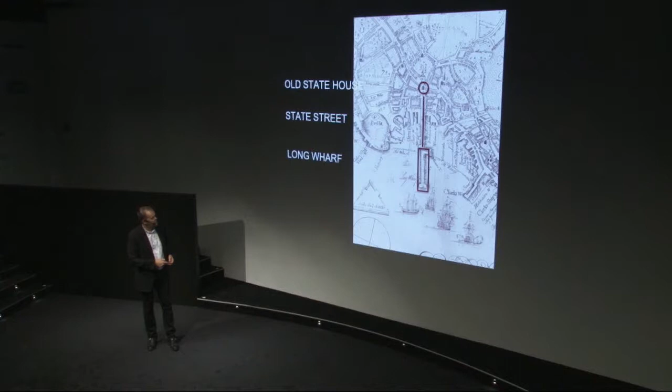This is Long Wharf. Here's the State House. And this route between the center of merchants at the wharf and the center of power at the State House becomes the origin of the financial district. So the financial district emerges between these two things because there's water and a hill.

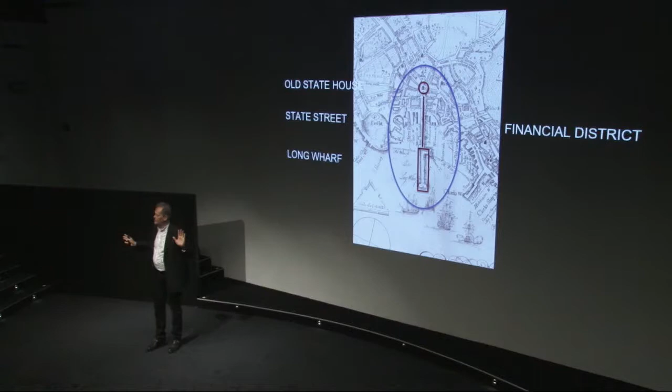It's not just that simple, there's an ecological structure to this place which leads to how settlement occurs. So there's the State House, and Long Wharf is here. This is the Boston Common, and as I always say, it's on the sunny side of the hill because pilgrims aren't stupid, they put the cows in the sun, not on the snowy side. It's all defined by the ecological structure of that place.

In fact, cities are really just about transactions. We come to a city because we want a transaction. You and I are having a transaction right now. If you bought something at lunch, that's a transaction. If you go to see your friends, that's a transaction. This crossing, this social intersection, is the reason that cities exist.

So we have to understand where they come from and how they're projected into the future. Just to finish on this idea, here's the Boston Common, Commonwealth Avenue. I used to live right here. And this pattern does not change in 400 years. So you will never see this building built over here, and you will never see this little house built in there, because the distribution of the uses in this connected infrastructure is entirely based on the ecology of place. So when you look at every city, you must think about that ecology.

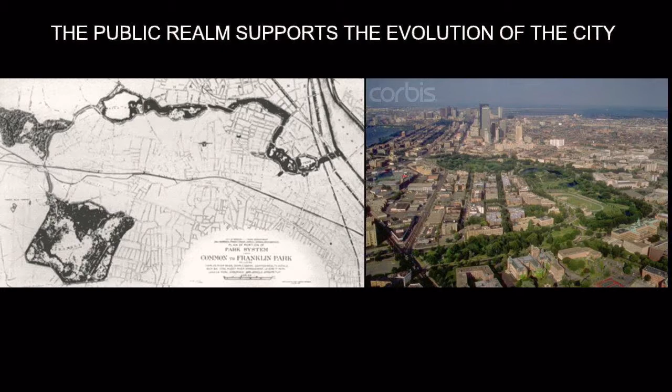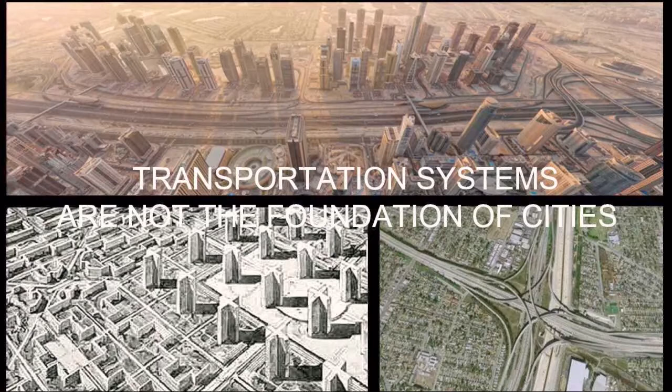That was then expanded by Olmsted into this beautiful system called the Fenway, and over time the city grows around that framework. My point is that transportation systems are what most people think are the basis of the city, and that is not true. Transportation is a consequence of the ecology and commerce of the city, it is not the driver. Most people working in cities think that transportation is number one. No, it's number 3 or number 4 or number 5.

Human systems and nature are the foundation of cities, especially if we want them to be sustainable. We at Civitas, which is the Latin word for city, like to say we're not suburbitas. We're about the real city. We build cities from nature up and culture down.

So which kind of city should we build? This is a very complicated system, and this is another very complicated system. But this is not the answer, to have one next to the other. Somehow we have to find a way of integrating these two things together.

Now I'll start to show you projects where in every project we are trying to integrate culture and nature together to make a healthier, more sustainable city. There are probably 3 or 4 projects here that you will recognize, but there are several that you will not recognize.

Am I talking too fast? Is it okay?

In America there's been a long progression of city building, but by the 80s the downtowns of most cities were failing because the suburbs had taken the economic energy away. We were looking for new ways to bring people into the downtown of every American city, hoping that new residents would bring new money, new life, new culture, and a much healthier social system.

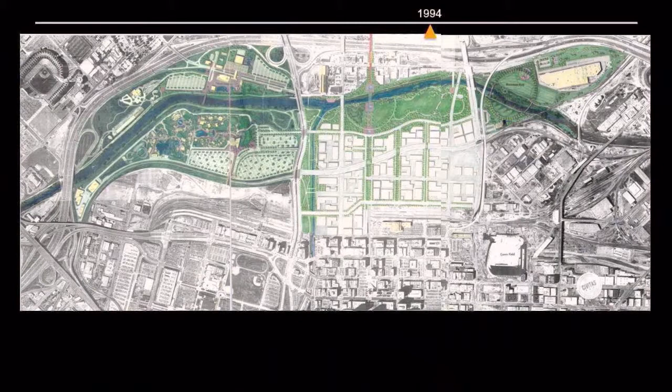We also reminded people that the city began here and the center of politics was here, and that this line was an important connection. We took the river itself and we actually rebuilt the river, about 3 kilometers of the river, rebuilt the entire bottom of the river to protect it because it was failing.

We moved the trains, just 2 tracks down the middle of the valley. All the other trains left. Again, the station, there's the train station right there. It's almost the same picture you saw before. It was empty.

Then we started building connections. We designed 3 bridges for pedestrians and bikes that connect the city together. And here it is from last year. So here's the river, this is the other river. Here's the park that we made. And this is all the new development that's taken place since 1988 when we began. Here's one of our bridges.

And these sites now are complete. This entire neighborhood is now done. About 6,000 residents live here today. And I would say it's about 5 million square feet. I can't immediately convert that into square meters, but it's a lot of growth.

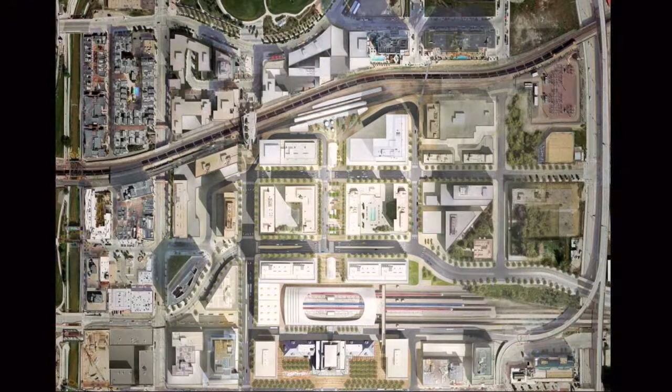So one of the things we did is we did a master plan for the train station. And something that's probably coming to the Czech Republic, it's not here yet, is that we cannot do anything in the United States without engaging many stakeholders, many groups from the public, and anybody that wants to come. So when we were given the assignment of doing the new master plan just for the station, which included the tracks, how do we bring trains, trams, buses, taxis, cars, bikes, and pedestrians all together in this station? That was the question. We were given a task force, a committee to work with. It was 91 people. So we met once a month for 3 years with 91 people every month.

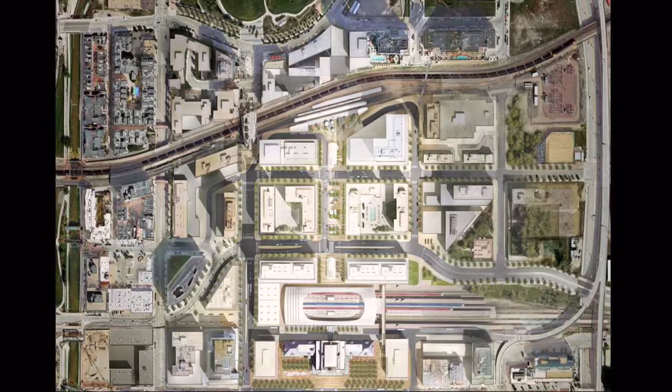So these are very complicated projects from a political point of view. But what you see here is a limited number of trains here. These are the trains that go across the country, passenger trains. We moved the freight trains. The freight trains were here, they moved sort of over here. This is our tram system and a bus tunnel. There's buses underneath that connect these two together.

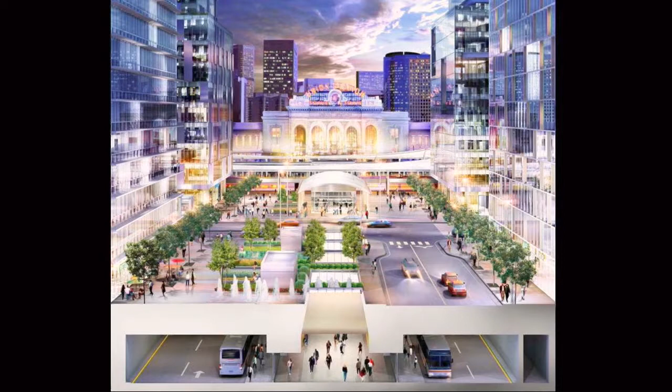And so here you can see, this is a drawing, but it's now all built. The train station, so the buses were underground because we were having too much trouble with too many things on the surface creating a problem. So we finally decided to put the buses below. And the station has become the new center of our city. It's really interesting because it doesn't have very many trains today, maybe only 5 or 6 trains every day, but it is the center of the city, and you can see the new development happening behind.

With that project, I learned how to deal with these very complicated things. Remember, there's law, there's politics, there's economics that all have to be solved. All those things have to somehow come together to make these things happen.

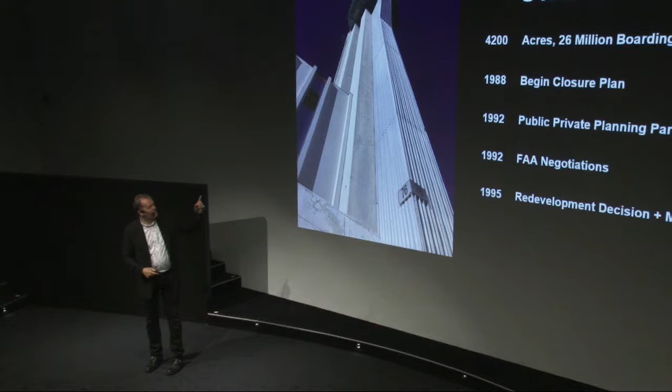So I have been working on this one project for 30 years, and I'm on my 4th mayor, still working on the same project. And so every new mayor, I have to tell them the history because they don't know it.

But we began a public-private planning partnership in 1992. A wealthy man came forward, he believed that if the city did the planning for the closed airport, they would make a mess of it. And so he stepped up, he created a foundation, he gave the foundation money that hired us to start working on a plan to find the best use of the property.

I began negotiating with the Federal Aviation Administration, so with the airline people in 1992, and we got a decision by 1995 that we would redevelop. I could speak for the next 10 hours just on this one project, so I now speed up. You can see it's only 5 miles from downtown.

I'm not going to read all this, but this is what I have done. I was a participant in a citizens task force, the author of the first plan, advisor on the Stapleton redevelopment plan, co-author of the development plan. I led all the rezoning. I formed a new governance organization, a new public not-for-profit corporation whose members are appointed by the mayor, and I was appointed by the mayor to lead this organization.

Then the organization started to have trouble, so then I was taken off of the organization by the mayor to do an audit, and we found many problems inside the organization. So we took the organization apart, and then I was asked to lead the selection of a developer. I also led the negotiating team. Then we wrote design review, structure, and guidelines. Since 1988, I chaired design review, and since 2002, we are also designing all the parks, which is actually 500 hectares of new parks. So imagine 30 years on one project.

But the reason that we have become global in our reach is this one project taught us everything about real estate negotiations, about real estate finance, about all the different issues with taxes, all the issues with the law and the politics and the infrastructure, and so on and so forth.

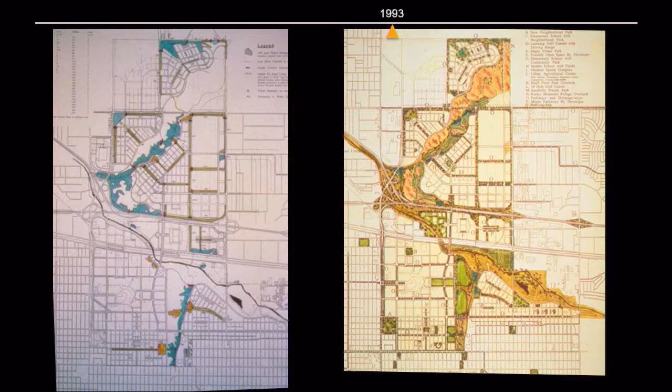But we began with nature. And what we found is that here's the airport, we had a problem with the stormwater. So we created a plan that would hold the stormwater on the site. So when the rain comes, it fills with water. And we use that as the backbone of a new system of open space. So we used the ecology. We created a new ecology as the basis of city building.

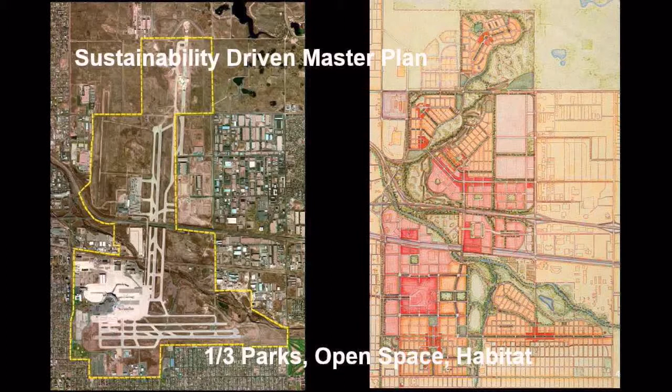So here is what the site looks like. You can see the comparison—I mean, complete transformation. Just for reference, the control tower is right here. You will see that again.

We decided that we needed to move the water across the surface. It's much more sustainable than putting the water in pipes. So we built these corridors, and now you can see the water is happening right here.

But we built this neighborhood intentionally, very low density. The big idea here was that Denver is a core city. At this time it was only 400,000 people. Today, Denver is 700,000 people, and the metropolitan area is 3 million people.

But the problem was that the core city, especially in the United States, people would move to the suburbs. So the people who were making the money, who had the young children, who had the good educations, they moved to the suburbs, leaving the people in the core of the city with much more poverty, much more social problems, much more health problems. So the objective of this project was to bring people back into the city. The way we could do that was we had to give them the kind of houses they could get in the suburbs. It's sort of a trick, like a magic trick.

Here is the tower. You'll see that one more time. One thing we did is make it full of different kinds of housing products. Each of these is a different type of housing, trying to attract different kinds of people at different ages, different levels of income, different family sizes, etc. It has been very successful at mixing people. And I believe a sustainable city depends on mixing people more than on mixing uses.

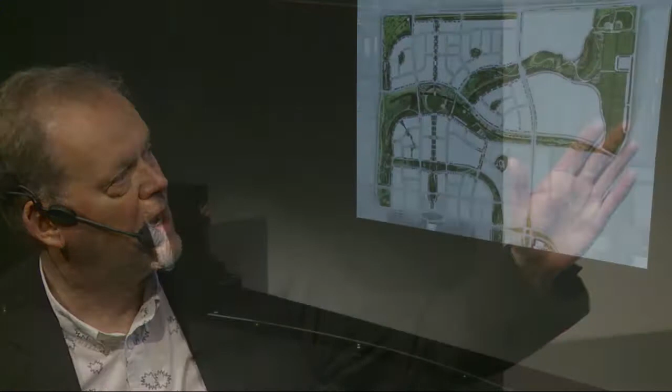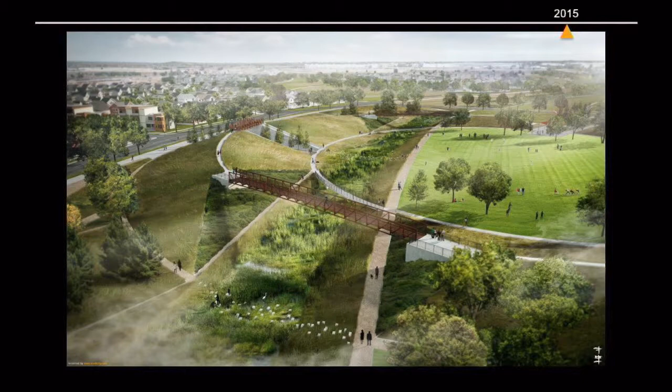We are now working on extending this open space system about 300 more hectares. These are, in fact, under construction right now. This is a stormwater pathway.

I'm not going to talk about these in detail, but we negotiated what I call a public deal—what are the responsibilities of each of the public organizations. There's a deal for the Stapleton Development Corporation, the not-for-profit we established, and this is how it was financed. Then we brought in a developer as a partner, and we have a number of points in the deal with the developer also. So we brought 3 entities together, and I'm sitting in the Stapleton Development Corporation with the developer on one side and the city on the other, managing the relationship between those two things as the site develops.

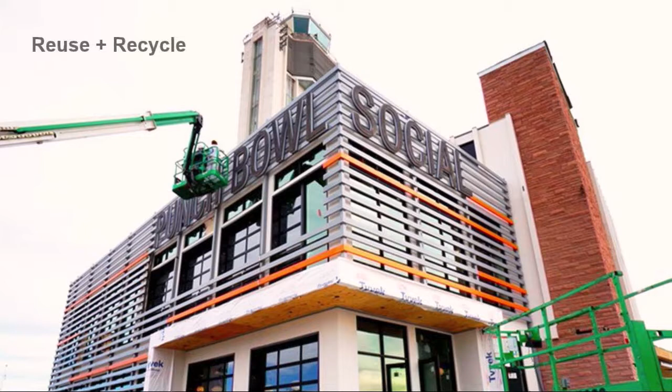So I think I've already shown some of these—they're in here twice. But there's the tower. The tower is now a really fun adult playground. It's got bowling, all sorts of activities take place here as the center of the community.

I like the idea of it being a flowing experience, more of a little bit of a tour. Is my mic on? It is. See, I'm trying to think about the camera angle.

Hop on your bike, we're rolling.

Here we are in East Village in Calgary. This is one of the most exciting urban redevelopments I've seen. We're building new streets, new apartments, a new library, a new performing arts center, and we've been involved in making the public places.

Nothing like a beautiful morning ride. There's nothing I'd rather do than ride a bike like this. You really feel like you're part of the landscape, and you can also ignore traffic rules. Try not to crash—it's about 8 or 9 degrees, crispy. Everybody's looking, wondering why he's got that funny camera on his bike.

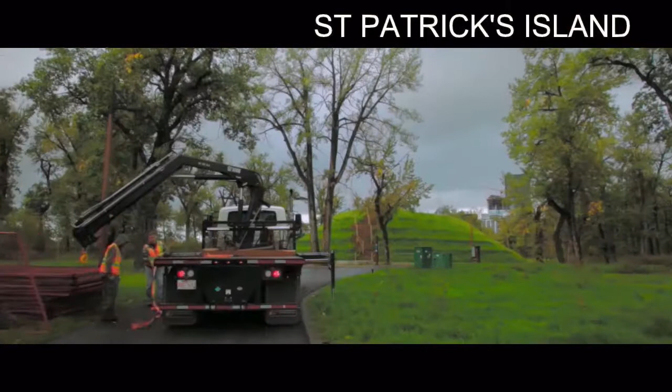We might get stuck in the muck. Yep, we're in the muck.

There's a large hill in front of us we call the Rise. When we dug out the breach, or the new channel, we had this extra soil, and so we made this hill. So you can get up on top of this hill and look back at the river in downtown, and people downtown can see you. This is a special place to come, an interesting place to be.

People told us it wouldn't be possible to get a permit to do such massive construction, to cut a new river through an island and to make a big hill in the middle of the floodplain. But we were able to do that because there's so much restoration that we're doing here.

It takes a team of different kinds of minds to design something like this, and the design ideas come from everyone. They come from that entire team, not just from one or two designers. I think the reason the island is already successful is that the design is based on some really truthful things about this place.

So that's just kind of fun to watch the movie. But it's a very, very important project because we not only restored the island—here you can see the breach, right here, where we cut through the island—it's been unbelievably successful in terms of bringing new people into the city and giving health back to nature.

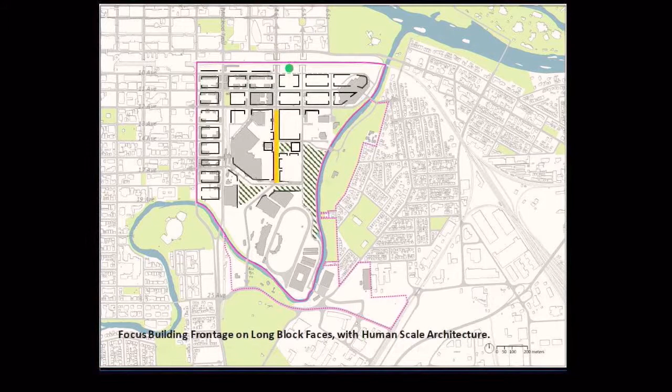I won't go too far to describe the plan, but first we're building a new transit line, second, all new streets, third, a new system of parks and open spaces. Then an urban pattern to align the streets with buildings, putting that into context, studying the densities and heights. So this would be the new arena—the existing arena sits right here, so the hockey team goes here.

These are very early models, very crude, but they show you where we're at in the planning process, looking at 7.4 million square feet of new development.

So we do that kind of work. Now here's something else, entirely different.

The North Embarcadero in San Diego looked like this. It's a working waterfront with big cruise ships and an aircraft carrier right here. This building was the headquarters of the United States Navy in World War II, and this is the second biggest naval base in the United States. But you can see it is not a very friendly place for people.

So we created a vision. This is very complicated. Our client is jointly the city, a redevelopment authority, the port, and the Navy—four parts to the client, and we have to make them all satisfied. We have to relocate the Navy ships, make room for the cruise ships, and so on, plus build all new streets.

So new streets—this is all new development. In fact, this building had a groundbreaking last week. This building and this building were finished last year, and the waterfront and street were finished two years ago. So we built it. What we did is we moved the street over and made a public esplanade 107 feet wide, with this beautiful street and fun custom street lights we designed just to create a signature.

We worked with an artist to design these pavilions. And this is a sustainability feature—a trench that takes the urban water. It's 1,000 feet long, and it takes the urban water and cleans it before it goes into the bay.

In case you think this was easy, we accomplished this project—it took 7 years. We were subjected to 5 lawsuits, people trying to stop the project, mostly because they wanted something else or they didn't want the public money spent. So we had to go through 5 lawsuits, but ultimately we survived and were able to get this built.

Many sustainable things—this is where the water is, this line is what we call the water quality. The pavers are made locally; we custom designed the pavers using local materials. All of the furnishings, the bollards, everything was built by local craftspeople. So we designed it all and worked with the local crafts community because that's more sustainable.

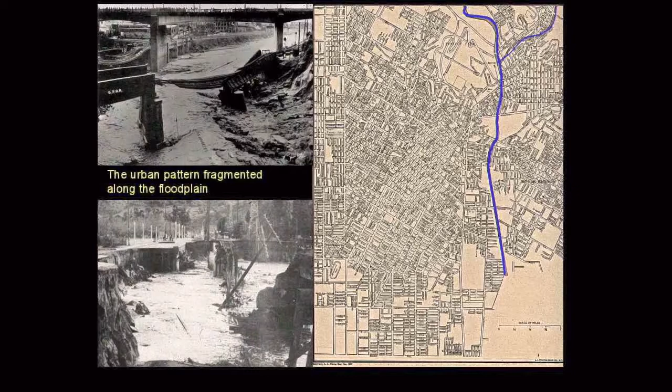It's really difficult, but you can see what the river had done. The river was very damaging—look at how the city doesn't get close to the river. So the Army Corps of Engineers fixed it by building walls.

Now, the reason I put this in here is one of the things we're doing in L.A. is working with many organizations. And this is the most complicated project I have worked on because of this—the river is a right-of-way, just like a street is a right-of-way.

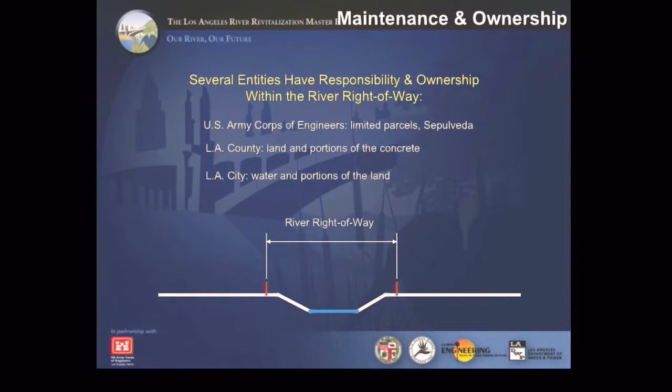The county of Los Angeles owns the concrete. The land is private land, so the river flows across people's private land. The county just owns the concrete; the city owns the water.

So just the water, not the concrete, just the water. But the Army Corps of Engineers controls all the rules. So it's a real mess. Different groups maintain different parts.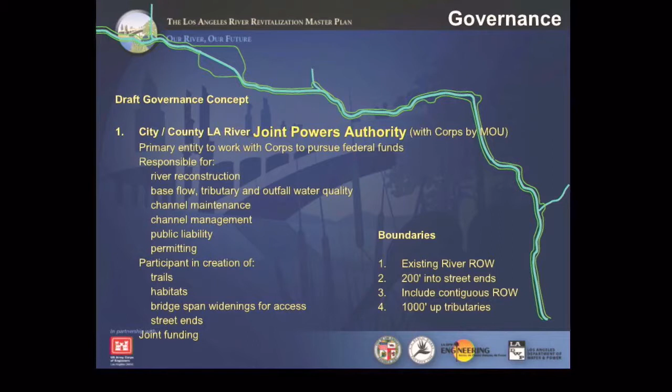So we created 3 forms of new government. First, a joint powers authority, an organization under state legislation that combines the Army Corps of Engineers, the county and the city into one entity to control the river. So now they are all together. And this all happened, by the way—we didn't just recommend it, this has happened. Then a revitalization corporation, a nonprofit development company, and then a foundation to help with supplemental fundraising.

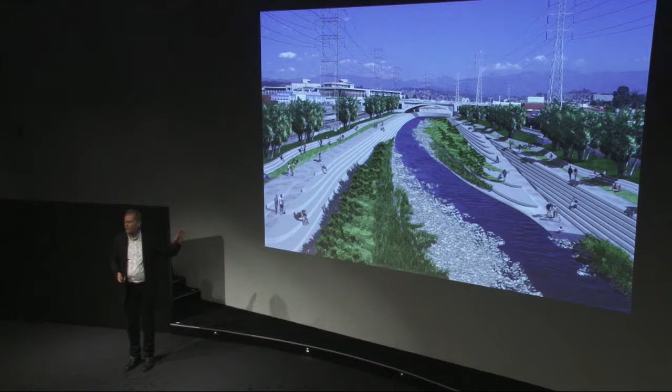So, lots of pictures. Only a couple more things—I'm almost done, I hope you don't fall asleep on me.

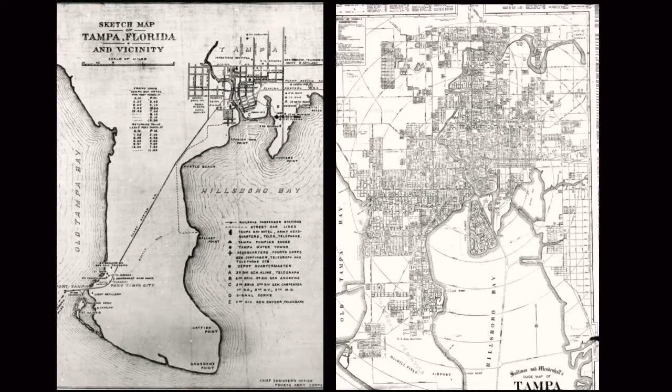In Tampa, I just put this in because we opened a new project last week in the city of Tampa, Florida. So here you see the city of Tampa. There's downtown. The site is right here, or right there.

Here you can see the site in 1960 was the center of Black Tampa, called Robert City, the African-American city. One of the many horrible things that have happened in the United States—urban renewal went in to clear the slums. So you can see what urban renewal did. They built a freeway and removed the heart of the black city. This is absolutely racist. They removed the heart of the black city and made a park.

And of course the black people wanted the city, not the park. This park became a terrible place. Many, many problems of racial oppression by the police, lots of problems with gangs, murders, you name it, all happened. So we were selected 5 years ago to remove this park and make a park that would work for the black people in the neighborhood.

And everybody. So I began this project. I personally did 45 one-on-one interviews in kitchens in the black community to build trust, to understand. So I heard all sorts of stories.

And then we started public meetings once we had built this trust to rebuild a sense of community. We would have as many as 300 people come to the meetings, and we spent hours at tables with these people, understanding how we could somehow give something, create something that would strengthen their community and not weaken their community.

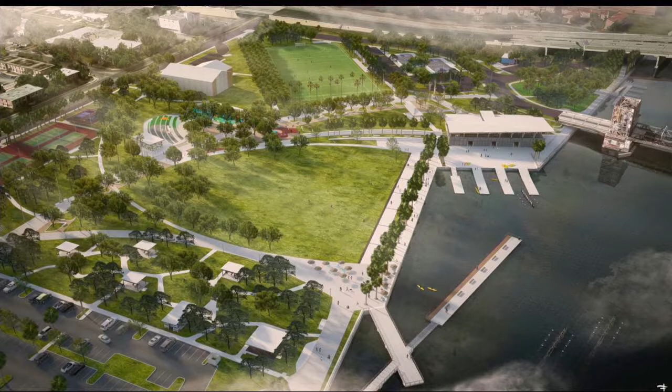So the idea is very complicated. First, it turned out there was nowhere in the city—it's a waterfront city, but there's nowhere you can legally put a boat in the water without paying. So we created a new boathouse that the city operates, with canoes, kayaks, paddleboards, dragon boats, and crew racing boats, so sculls, about 150 boats, with a new community center on top for the neighborhood.

Then we took the seawall and cut it back and built a floating dock. The reason we did that is there are boats here, so this creates a protected sheet of water which is calm. If you've never been on a paddleboard or in a kayak before, the waves—you can't take it. So this makes it very calm.

Then there is a great lawn. The community absolutely wanted a large area for picnics. To our surprise, they wanted tennis, basketball, more basketball, football, and a giant playground.

And so here are some renderings that we did. These are about 4 years old.

And we opened it last weekend. So here's the great lawn. Here is the boathouse, it's just crazy, full of boats. This is the river promenade. Looks just like the rendering.

And then we had a concert that night. Had 35,000 people came to the opening. So we were really proud of this. And there you see the little dock that protects from the waves.

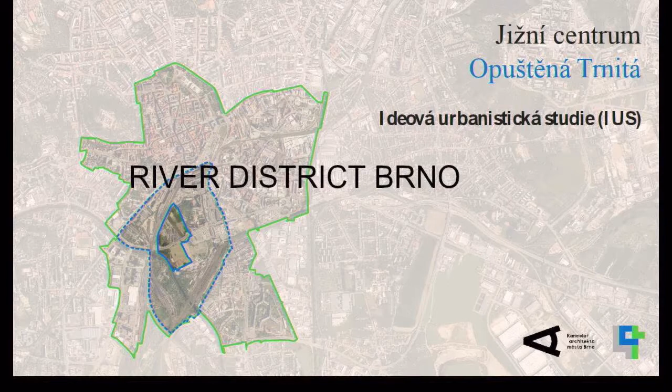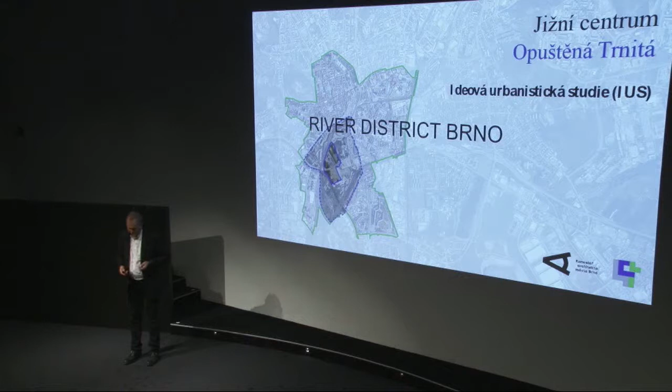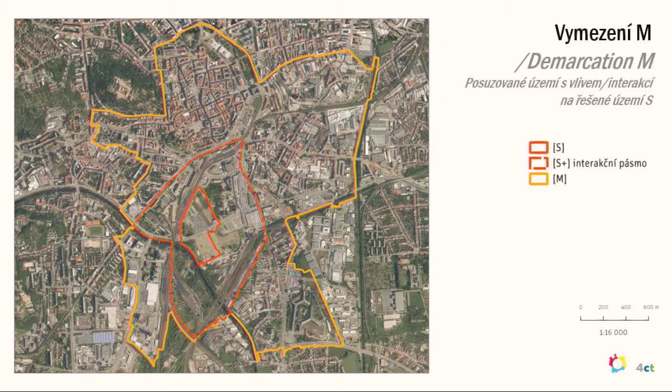A big success. So the last thing, Brno. We are working, here is the central city in Brno, and the train station is right here, and there's a large area of open land. We are working with KAM, which is the planning agency, with an urban strategies company here in Prague called 4CT, working on the strategy of how you pull this together. Also with the Brno architects Burian and Křivinka, really great architects. This is a very interesting collaboration of our clients, 4CT, Burian Křivinka, Civitas, and KAM, plus staff from the city. I had a meeting with about 20 city staff yesterday, and the project is moving in a very positive direction. So what we're looking at is different scales of sites.

So here you can really see the city. Here is the train station. You can see how open this land is, and the river is here. So if you think back to what I talked about, the project I did in Denver, it's the same project, exactly the same project. So this is what it looks like. Imagine you are less than 1 kilometer from the center of the city, and you have nothing but open land. A tremendous opportunity for the city to attract new people, young people, new businesses, innovators, etc., to make this city grow in a very healthy way.

And here you see it from Google. So there's the train station. The cathedral is here. Interestingly, there's another train station right here. This one is mostly freight, this is passenger. So if you take the train from Prague, you get off right here today. But look at all this open land next to the river.

So one of the things, if you ever go there, I'm sure most of you have been, is the train station. The front of the train station is here, and here's the actual station. Here's how you walk into the city. Everything else is the back. This line right here is a wall, 7 meters high and about 2 kilometers long. So front, back, front, back. Very simple. There's one more problem: you cannot walk from here to here very easily. You can walk right here, you can get out right there, you can drive a car in here. It's very isolated.

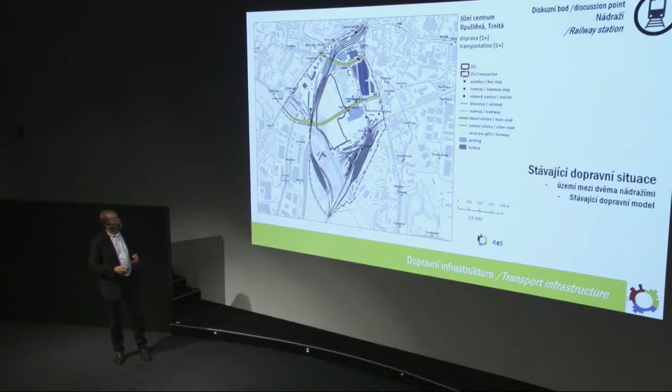So here is a plan. So existing train station, look at all the tracks. You can see how this zone is isolated by the railroads and the river. And the question is, how could we open this up?

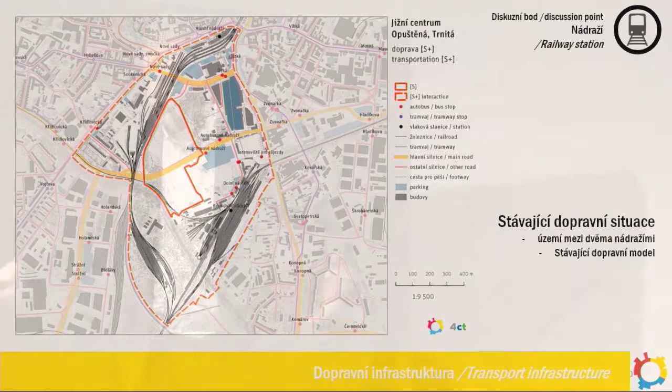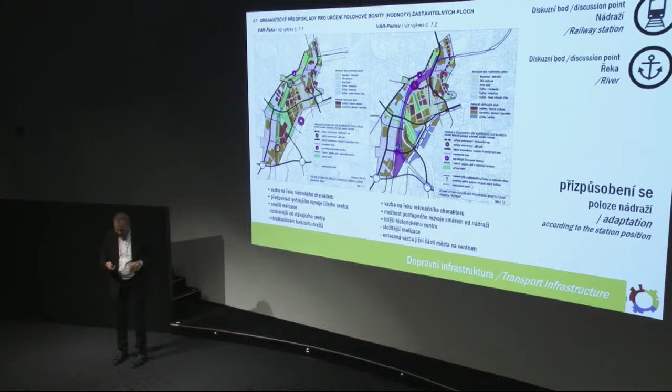So for many years, the city has been debating whether the train station should move. And this is almost funny, but the plan for Brno in 1926, City Council approved the plan in 1926, says move the train station. True, so the station is here. 1926, move the train station. 4 more plans, move the train station. And now 2 months ago, the City Council also voted to move the train station yet again. So our job with our team is to see what is possible if, in fact, the train station moves.

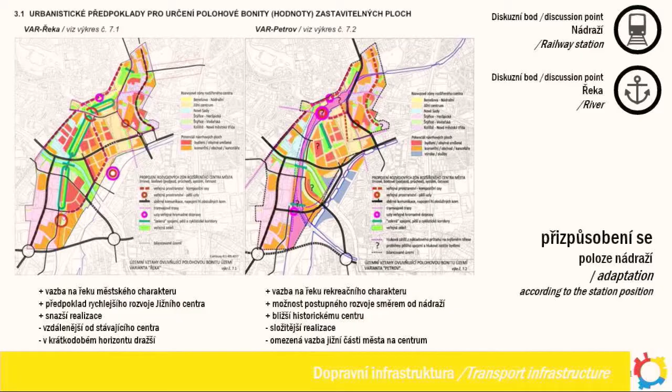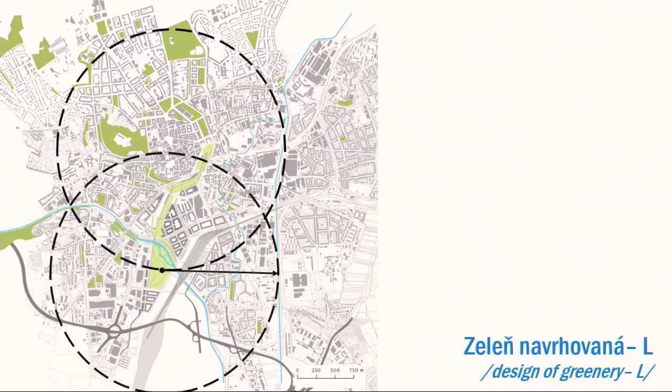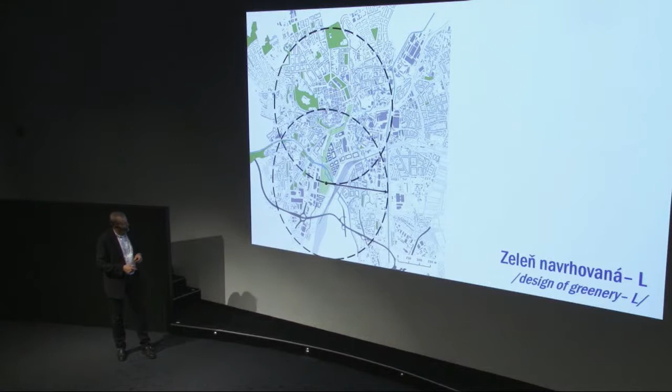So today you have a ring of open space, parks, and institutions around the old city, but a barrier where the train comes through. Our big idea is to move the train and make a corridor of green with a new park. So here's Lužánky Park, about a kilometer and a half around the center of the city. Imagine if we make a new park here that's connected back, how we can influence this part of the city the same way. We can really extend the energy of the river much deeper. And of course, as you can see, if you look at land use patterns, this is really the industrial part of the city.

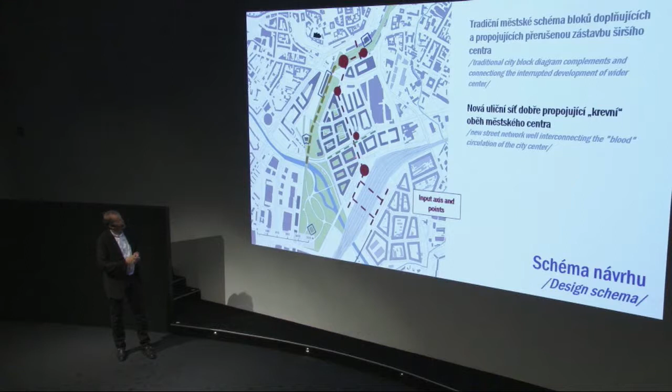So the basic idea is simple: new train station, a new boulevard connected with a series of plazas that connect you to the city, and green space to a green park. So the idea, again, a very green plan. I'm only showing you this to show there's a lot of work that's been done. So we have floor plans for all these buildings, a lot of study of what's the market, what's the mix of people, what's the mix of units, what's the mix of business, etc.

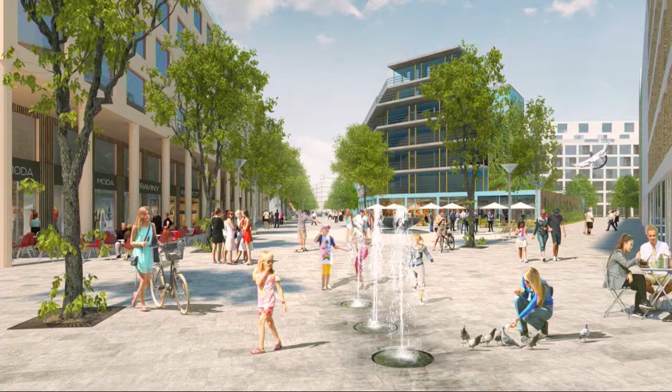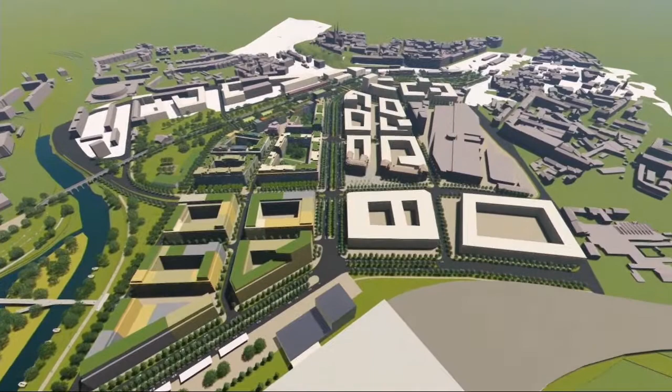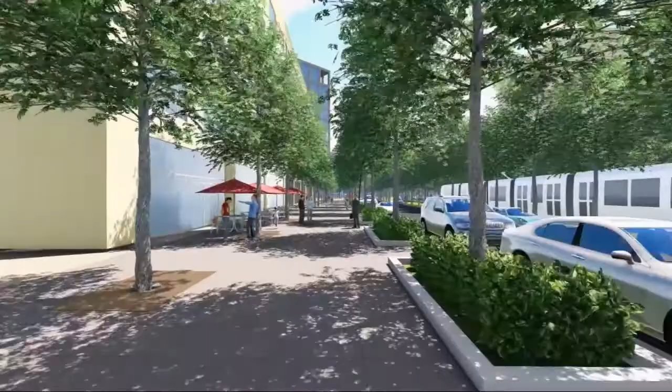And just a few renderings of a core plaza within a residential piece of the neighborhood, what a street might look like, emphasizing having a diversity of building types, but contemporary buildings that still refer to the history of Brno, but are new living and working environments, projected street scene. And then one thing at the end, just a minute and a half, a little movie that we made. So there's the cathedral. So if I'm leaving the train station, the new station, I'm looking right at the cathedral, coming down a new boulevard.

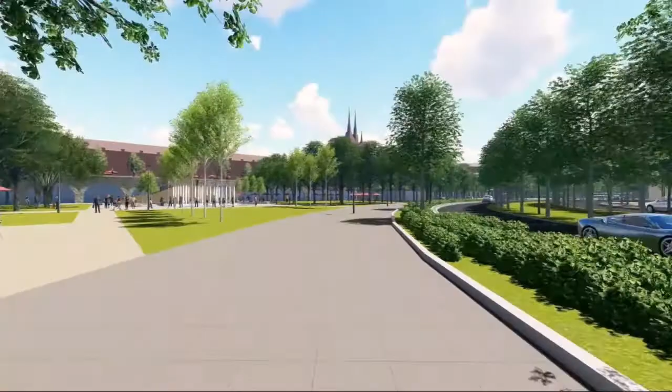To a new plaza. There's a historic building called the America Building here, and an old viaduct. Then to where the street pivots to make a new central plaza as a gateway to connect the new part of the city to the old.

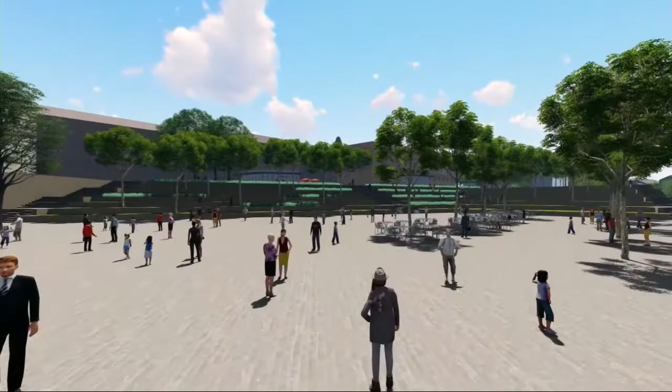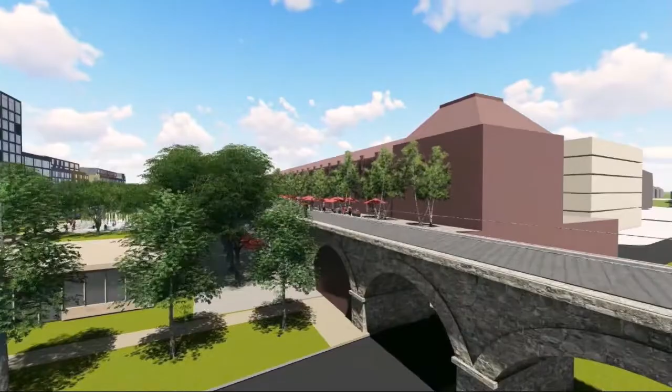The train station with a park behind. And that park, train station here, looking back to the central plaza. And then looking down the corridor where the trains are today, that's the America Building. And this we call the High Line, this arch which is there, to expose it and make it a special place for pedestrians.

To renovate the America Building, to have sports fields, a school, a major amphitheater, and then a new riverfront park, which expands flood storage for the city. New flood protection with a levee, to protect the city from flooding, which becomes a promenade, and now you can see the connection of the new park, the new city back into the old.

So that is the end of my presentation. I apologize for talking so long. Thank you.

Thank you, Mark, for a fascinating presentation. Before we open the floor to the public, a quick question: you've done a lot of amazing work in Brno. I wonder, have you heard any feedback from the public yet? I mean, we're grumpy people, we're easy to criticize a lot. We don't praise enough. So have you had any initial feedback from Brno?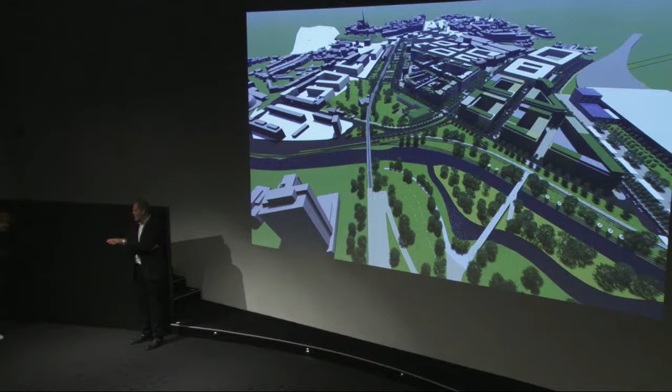We have been working in this interesting partnership with the city and KAM for six months. We've had a series of workshops, and this plan is the result of those workshops. We've been working through transportation, bikes, pedestrians, parks, infrastructure, land use, all the different parts, and have just come to this point. So it has not been taken for a walk yet—tonight is the first time out the kitchen door to show you the walk. But I can tell you we have very positive feelings from city staff on this.

When is it expected to be finished? What's the roadmap like? Let me look at my watch. Yeah, of course, it should be really soon.

You've been working on Denver for 30 years, so are you going to be in Brno for another 30 years? This will take many years, of course, and it will be very complicated. Like my other projects, there will be complicated steps and a lot of discussion, public debate, a need for many different kinds of negotiation and lots of technical studies too. So I wouldn't project the timeline—certainly at least a decade or more.

One last question before I give the microphone to the public. You've been coming here for a while now to the Czech Republic. Have you noticed a change, maybe not just in the physical appearance of the city, but also in the approach of the public or of the planners? The biggest change I've noticed is I'm a vegetarian, and there's more food I can eat now.